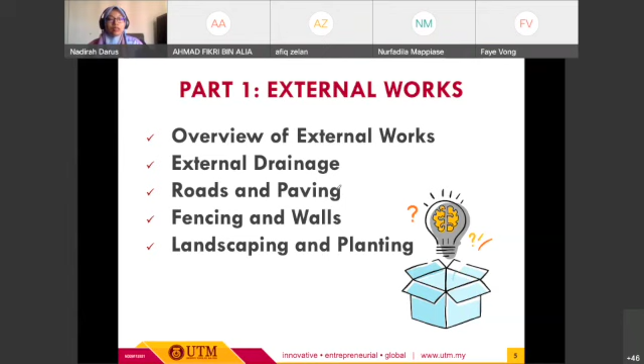Sama juga, we have two parts. First topic that we try to cover is on external works, and then later on we will cover on IBS, Industrialized Building System. For external works, basically this is the content ataupun sub-content, which consists of overview - lebih kepada introduction ataupun definition - and then we try go through each of these elements of external works. Lepas tu kita continue to the second part.

Untuk external works ni, basically it refers to any works carried out to the external surrounding ataupun environment of a building project. Maksudnya once building has been constructed ataupun completed, the next process ataupun construction activities is to construct the external works. So these external works can be works to functional or aesthetic features. Sometimes dia boleh jadi both, functional and aesthetic features to the building surrounding ataupun external environment. Kalau kita tengok dekat ni on our right side, we have a detailed definition by

Construction Industry Development Board, CIDB. This is the detailed definition for external works. Kalau ikutkan kat sini, dia quite similar. So it mentioned that external works refers to any shelter, linkway, external drainage, roadwork, car park, semualah, any facilities that required for the buildings ataupun for the project itself. So dia boleh jadi banyak ataupun less than this lah dia punya external works, depending on the size of the project, depending on the requirement.

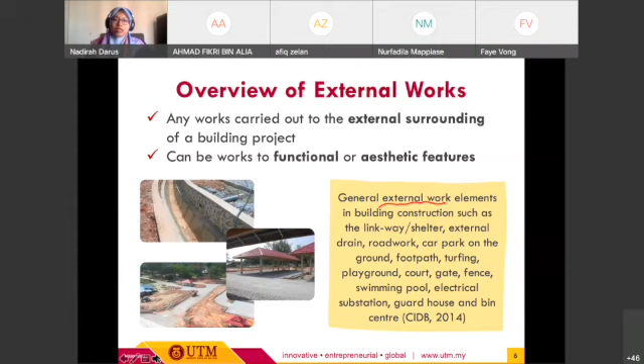Kalau kita tengok ni contoh-contoh lah macam drainage ataupun longkang surround the building area, external area. Lepas tu kita ada roadways ataupun car parks dan we have any paving ataupun pavement, semua tu fall under this external works. Basically dia quite straightforward je lah, cuma kita kena betul-betul ada identify apa jenis-jenis kerja fall under external works.

Alright, so we try to go through one by one. First element ataupun first work adalah yang paling utama selalunya external drainage, dia punya sistem perparitan lah around the building. Maksudnya daripada building dia nak transfer to the discharge, kita kena cover lah subtopic of external drainage ni. External drainage ni dia ada two main types: first one we have surface water drainage, and then we have foul or sewerage drainage. Yang ni memang fokus on the sewerage itself.

Okay, sebelum kita tengok detail each of these two drainage, we need to know the principles of good drainage. Basically untuk good drainage, we need to have adequate strength and durability of materials. Sebabnya kalau kita tengok kebanyakan drainage ni dia install atau constructed underground, underground piping kan. So that for sure we need to concern with the strength and then durability of the piping itself, for example lah. That's why we need to have this first principle.

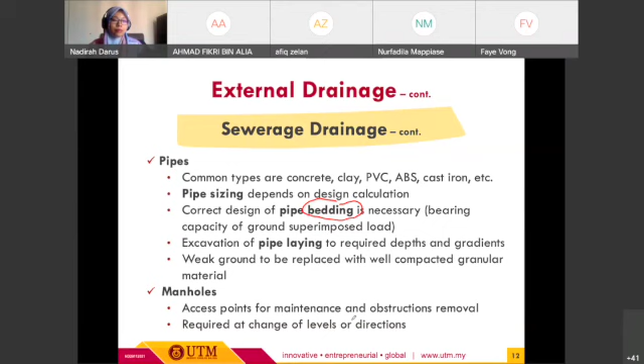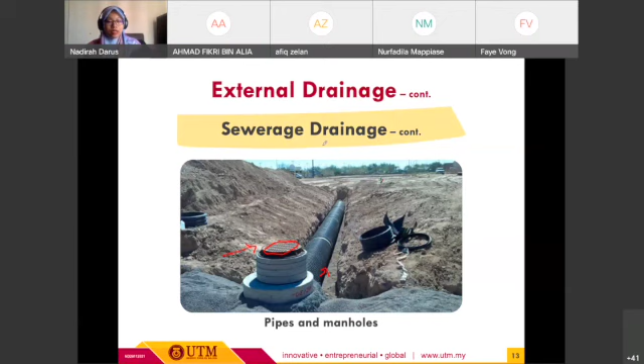Okay, so up to just now we have covered the first one untuk external works, and then the second one kita proceed kepada roads and paving. So untuk external works tadi, yang first one, external drainage, semua clear?

Okay ke? Okay okay, Aida okay. Alhamdulillah semua okay, hopefully semua masih okay.

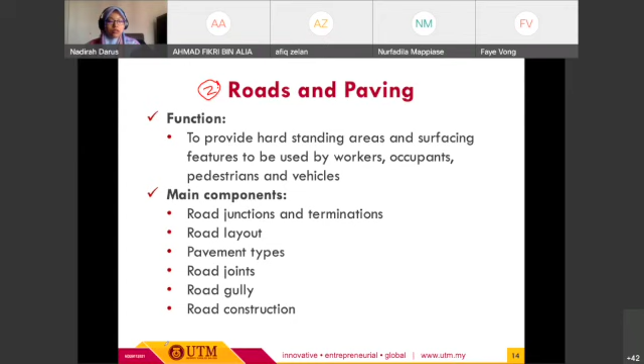Okay, untuk the first one we have road junction and termination. Kalau kita tengok dia punya term pun quite straightforward. Junction ni intersection ataupun simpang lah. Ni pun kita kena ada proper layout for the proper planning for the road junction and termination. Termination ni selalunya hujung, hujung jalan ataupun kadang-kadang kita panggil jalan mati. Maksudnya once kita dah ke termination ni, selalunya kalau contoh kita dah sesat, kita kena U-turn balik. So basically ni dekat road termination.

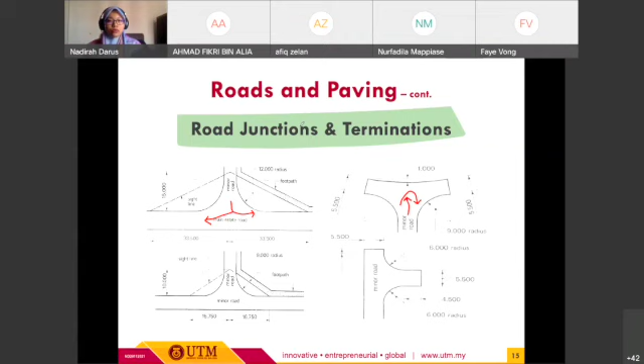Okay, so kita cuba tengok contoh, this is some of the example for schematic drawing for these two components. Kalau kita tengok ni, ni road junction, dia relate dengan road layout. So this is the common road layout at residential areas. Kalau kita tengok kat sini, kita tengok ada road junction, ada to the left atau to the right. So maksudnya jalan dekat area perumahan ni still ada junction.

Basically kalau untuk termination dia dekat hujung, maksudnya dekat end corner lot, memang dekat unit rumah yang paling hujung. Baru kita boleh access, maksudnya kita dah tak boleh access lah paling hujung, selalunya kita akan terpaksa U-turn, ke depan balik ke jalan utama. Okay, so untuk road layout ni, the planning itself ataupun the design, dia punya road width according to the traffic flow.

Okay, dekat area perumahan kita kena tahu berapa dia punya lebar jalan tu sendiri. Okay, selalunya dekat jalan perumahan dia tak adalah terlalu lebar sebab akses dalam kawasan perumahan dia limited to macam heavy vehicle tak boleh, depending on the restriction ataupun limitation.

So we need to look at the traffic flow. And then there are also layout problems in terms of this, relating to junction and termination of cul-de-sac routes. This cul-de-sac refers to the termination point.

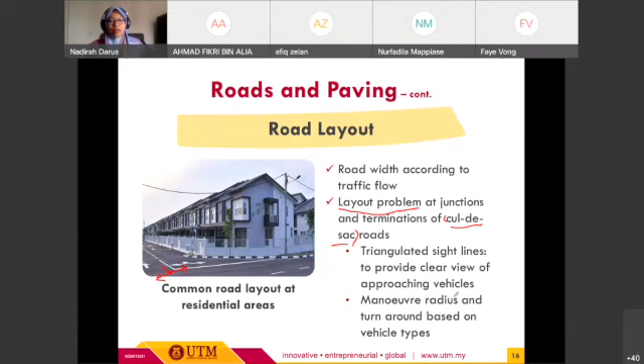Okay, so that's the second component. The next one, we also need to briefly know about pavement types. Basically if we follow the topic, pavement itself is a big topic, but it's okay for our class, we try to cover it briefly so that we can refresh, so that we at least know. I think everyone already knows about pavement types.

We have the most common ones, rigid and flexible. This is also applicable to main roads or roads outside. The basic principle is the same. We have rigid and we have flexible.

What's most important is the main difference, which is in terms of material. For example, if rigid, it is constructed using concrete. Compared to flexible, it is constructed using asphalt or bitumen covered stone, or similar material, since now for pavement research we have various alternatives. So we try to at least know the basic fundamentals.

And then as the name mentions, rigid has no flexibility compared to flexible concrete, or flexible road or pavement. Then there's a description - for rigid, it requires joints.

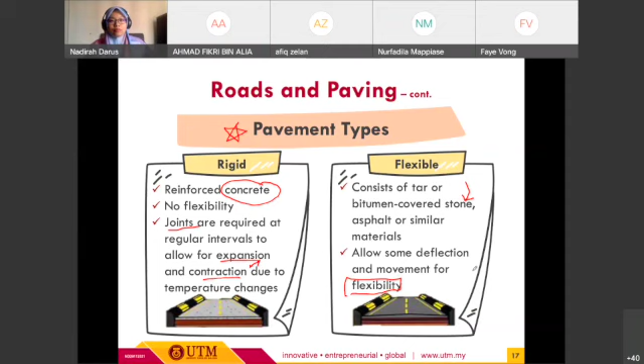Okay, can everyone hear? Okay. Can you hear, Aida? Still okay. So I hope the rest of you can still hear too. Okay, continue. Alright, thank you.

Okay, continuing to that, still regarding rigid and flexible pavement. In terms of advantages, if we look at rigid pavement using concrete, it is more about long and maintenance-free surfaces. Compared with asphalt pavement or ordinary tar road, it sustains longer.

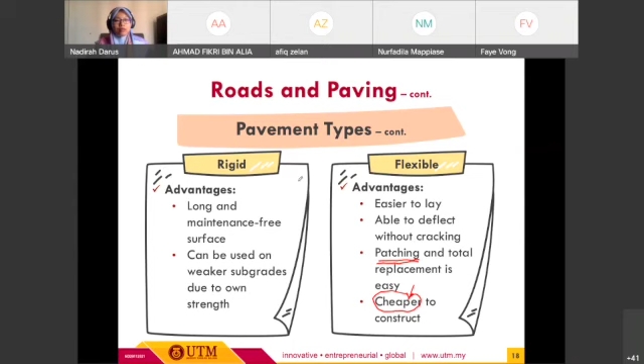Okay, now in contrast to the previous one, I think I already mentioned the disadvantages for each of the pavement types. Okay, so later try to go through them one by one.

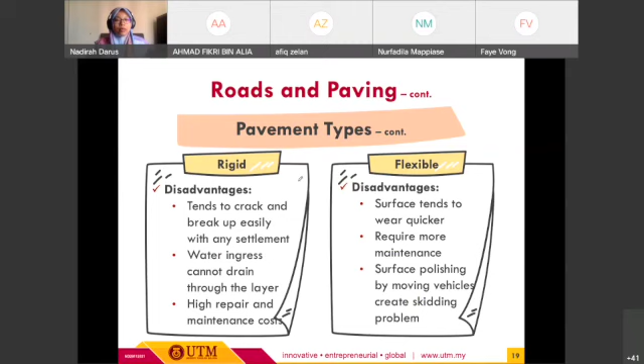Okay, the next component related to roads and paving as external works. As I mentioned previously, we have joints. Road joints are basically for the concrete pavement or rigid pavement, because it needs allowance for expansion and contraction joints. This is very important, because concrete pavement can easily fail or get damaged, especially in terms of cracking, due to temperature changes, since concrete has expansion and contraction properties.

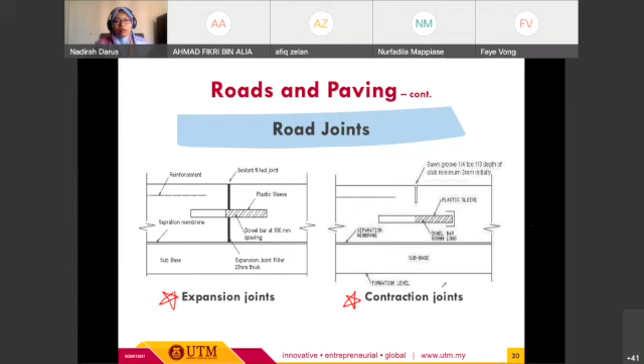Okay, the other component related to roads and paving, we need to have road gullies. This is for drainage too, relating back to external drainage, because it's part of the road water collector. It collects water from the road surface - when rain falls on the road surface, there's usually a slight gradient to allow for flow, so it goes into the road gully, which collects the road surface water and discharges it to the storm water sewer or surface water sewer. That's the component for roads and paving.

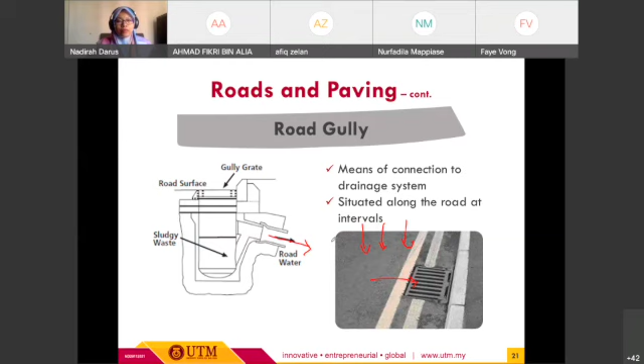Another thing about roads and paving: if we look at road construction, it will begin after the completion of the drainage system, service ducts and other utilities below the road pavement. So any underground works or activities we need to do first, and only after all underground work is completed do we proceed to road construction. Otherwise it would be wrong - we can't construct the road first and then do the underground piping.

So that's more about the method of work or procedure itself. We need to settle any underground piping work first, then proceed to cover it up, then proceed with road construction. After that, surfacing will only be applied after completion - this is the final finishing of the road surfacing.

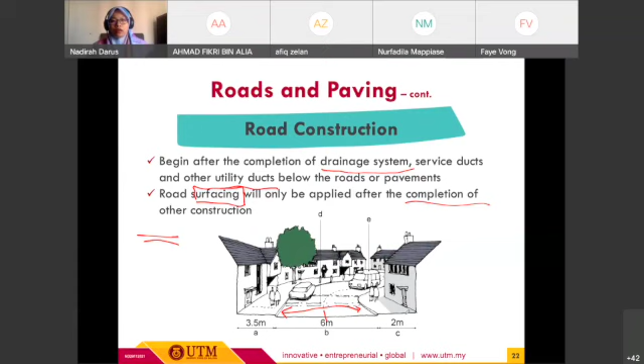So if we look here, this is just a simple illustration of our roadways, usually 3 meters width for each lane, 3 meters, and on both sides we usually have a footway, meaning a pedestrian walkway. This depends on the design or detailed landscaping for each building or project itself. So that's all for the second external works.

Next we have fencing and walls. So far okay for the second one, external works? Alright, then for the third external works we will cover fencing and walls, sometimes called walling - whether we use a fence or construct the wall itself.

So the function of fencing, which we already know - the most important is in terms of privacy or security, to avoid or cut down any unwanted pedestrian or vehicular access. Security, then to provide privacy, and then to give delineation between areas. This means when we construct fencing or walling, we can limit the boundary. So that's the main function of fencing.

Okay, the main types of fencing are low level and high level. Usually low level can just be wooden, meaning using a wooden fence, just simple fencing.

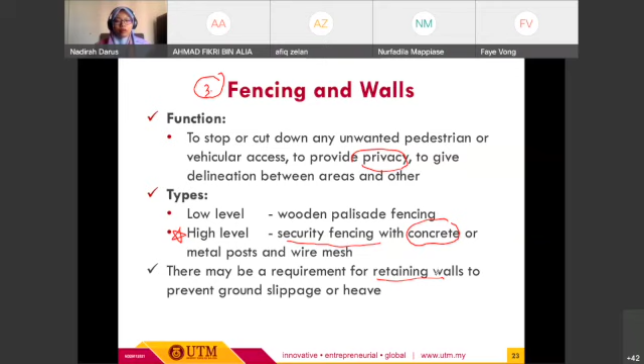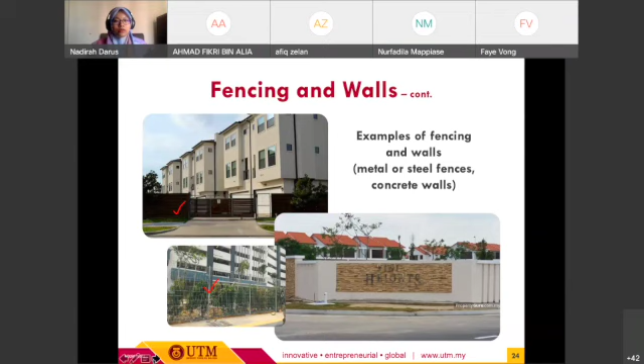Yang ni contoh dekat Mutiara Rini, residential area Mutiara Rini, which is Rini Heights. Rini Heights dia ada concrete punya wall surround the residential area. So saya rasa that's all for the fencing.

Untuk fencing, untuk pagar building tu dia quite straightforward je. And then we have the other components for external works, which is landscaping and also kadang-kadang kita panggil planting, lebih kepada landscape surround the building area atau external area of the building.

Okay, there are several functions untuk landscaping and planting ni. First, we want to protect and reinstate the site, sebab once the building complete, luar bangunan tu punya surrounding, punya environment for sure akan ada kesan tanah, tanah yang masih tak level, dan environment in terms of landscaping memang tak cantik. So that's why in terms of dia punya estetik dan untuk improve the pemandangan di luar bangunan, kita cuba construct external works focusing on the landscaping.

Lepas tu yang paling penting juga untuk activity landscaping ni, kita try to prevent erosion of land and slope. Kalau kita tanam pokok, tanam rumput, that one will be part of the natural support to avoid this erosion of the land atau soil.

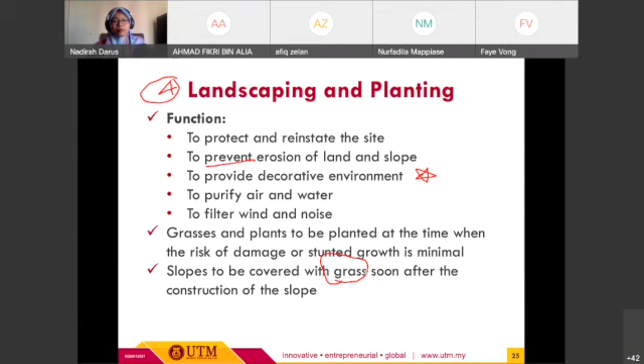Ni contoh untuk landscaping and planting. Ni dah jadi common view, kita dah biasa tengok di sekeliling luar bangunan tu ada all this kind of trees atau rumput, pokok bunga ke, to improve the landscaping of the building itself. Macam ni dekat slope dia dah tanam rumput. Memang kita pun ada firm atau company yang memang untuk landscaping je, so dia punya kerja will focus on the landscaping and tree planting for the external building area.

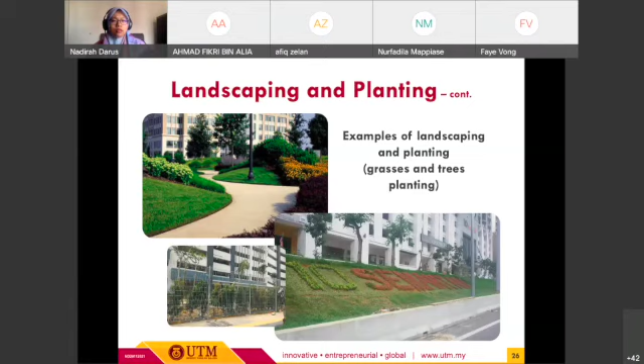Asalnya tu je untuk landscaping. So sebelum kita proceed to the second part, kita rehat kejap. So saya rasa without further delay, we will continue to the rest atau second part of our today's class, okay, of our lecture.

Next one we are going to cover part 2, which is on IBS, industrialized building system. So this is our second part. There are several sub-contents to be covered, starting from the overview until the challenges of IBS implementation. Rasanya dah tak banyak dah yang ni. So we try to cover each of the sub-content.

Alright, for the brief introduction on IBS, basically IBS refers to the construction process that utilizes techniques, products, components of building system which involve prefabricated components and on-site installation.

Okay, kalau kita tengok kat sini, IBS ni most of us dah memang well versed lah, dah memang familiar dengan term IBS sebab IBS ni pun dah jadi current requirement, dia punya in terms of implementation dan juga in terms of dia punya awareness tu. Kalau ikut sekarang masing-masing dah aware lah dengan apa itu IBS.

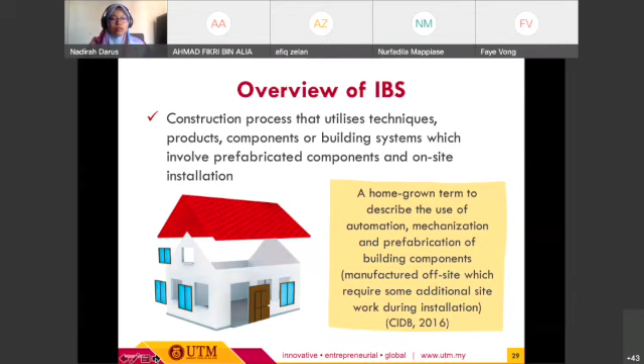Okay, so the next one. For the overview of IBS, kalau kita tengok IBS tu sendiri, dia punya components is systematically done using machine, formworks and other forms of mechanical equipment.

Lepas tu dia punya konsep adalah components ataupun building components itself are manufactured atau produced off-site and delivered to the construction site for the erection ataupun installation. Maksudnya instead of in situ punya works, in situ maksudnya kerja dekat site tu dari segi concreting ataupun dia punya formwork installation, dia dah buat siap-siap dia punya components at own factory lah ataupun manufacturing site, and then component tu will be delivered to the construction site. Lepas tu all building components such as wall, floor slab, beam column and staircases are mass produced.

Okay, maksudnya in terms of quantity, components will be produced in mass quantity either in factory ataupun sometimes dia boleh jadi juga dekat site, tapi with the strict quality control and minimal on-site activities. Maksudnya most of the components will be produced in the factory. Some maybe minor components ataupun untuk complete the installation, that one will be completed on site. Lepas tu dia involve the mechanization of the building process, sebab benda tu dah produce in the factory and then transfer to the construction site.

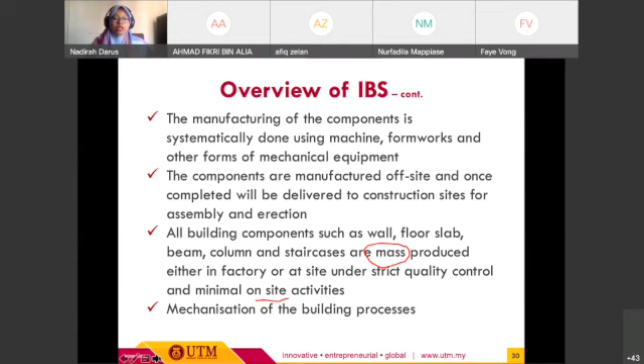Okay, so as for overview ataupun introduction juga, this is regarding the adoption of IBS in Malaysia. Maksudnya lebih kepada dia punya timeline ataupun dia punya history of the IBS in Malaysia. Okay, if we look back untuk IBS, kalau kita tengok dia sebenarnya dah lama introduce ataupun dah ada dekat kita punya negara lah, maksudnya sebelum ni dah long introduced since 1960s.

Okay, introduction of IBS based on European countries. Sebab during this time our country representative lah ataupun government representative basically from JKR Public Works Department and also Ministry of Local Housing Department, kalau saya tak silap, they represent and participate in the evaluation and they join the visit to the European countries in order to evaluate their housing plan. Okay, so dari situ IBS ni dah mula ataupun dah being introduced in our local scope, since 1960s yang ni. Ini dia punya, kalau kita tengok balik lah dia punya timeline.

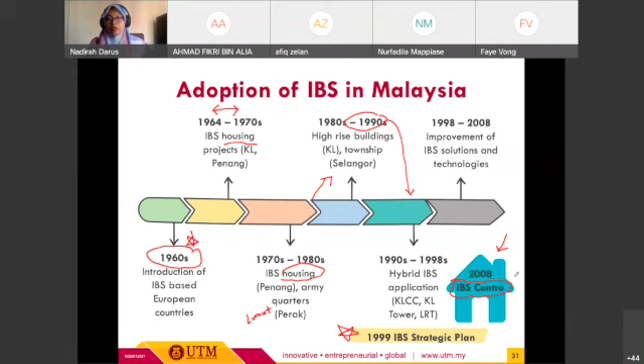And within 2008, an IBS center was also constructed under CIDB. So this is the journey or chronology of IBS in Malaysia up to 2008, and then it continued.

As part of their initiative or measures, they came out with the roadmap for IBS, in terms of strategic planning for IBS implementation. The first one was a 7-year plan, 2003 until 2010. Later on they came out with the 2010-2015 roadmap. So throughout the implementation, this is the general chronology.

At the same time we also have the CIMP, Construction Industry Master Plan, which highlights IBS use. Then up to 2020 we have the Construction Industry Transformation Plan, CITP. And up to today, IBS has become even more commercial in terms of the manufacturing of IBS components and the construction itself.

Okay, let's look a bit later at the rest of the content related to IBS.

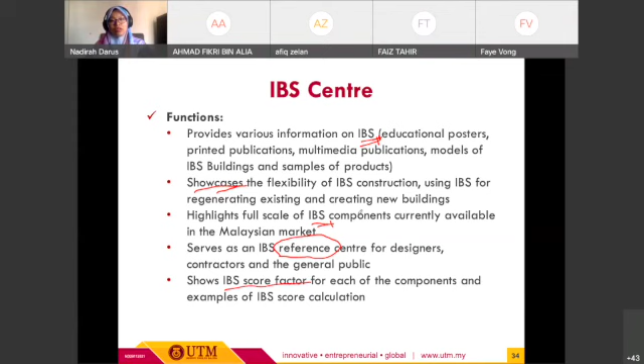So apart from providing various information, it showcases examples of IBS construction, whether for regenerating existing buildings or creating new buildings using IBS. Then it has examples of IBS structures and components currently available in the Malaysian market, more related to manufacturing. So far IBS Center or CIDB is the main reference for designers, contractors and the general public for the implementation of IBS. Let's look at an example of IBS components under IBS Center.

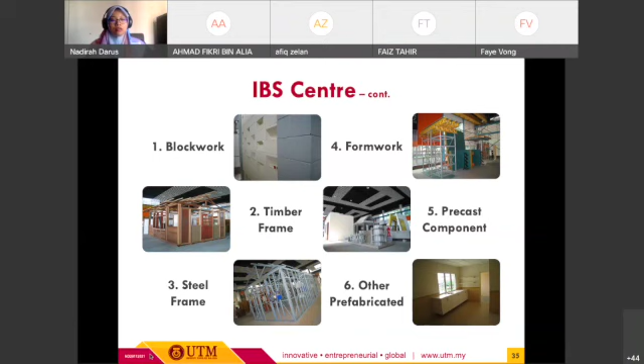Again under CIDB, as I mentioned, IBS in Malaysia is currently directly in charge, handled by CIDB. According to CIDB, they have classified the IBS system into 5 categories such as this: precast concrete frame buildings, precast concrete wall, so there's frame, wall, and slab, then steel formwork and also steel frame buildings. So these 5 are the main categories of the IBS system as classified by CIDB.

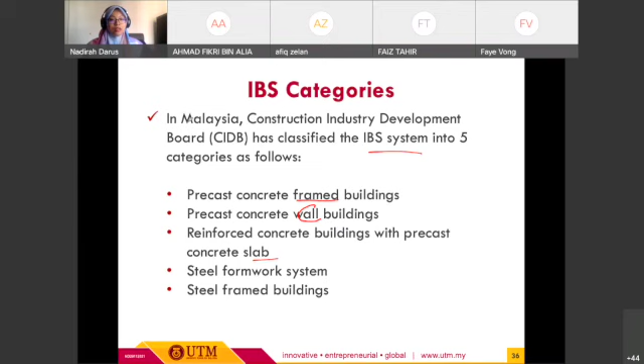This is an example of an IBS structure that has structural steel frame, then slab, and column and beam. So this is the sample for the IBS illustration.

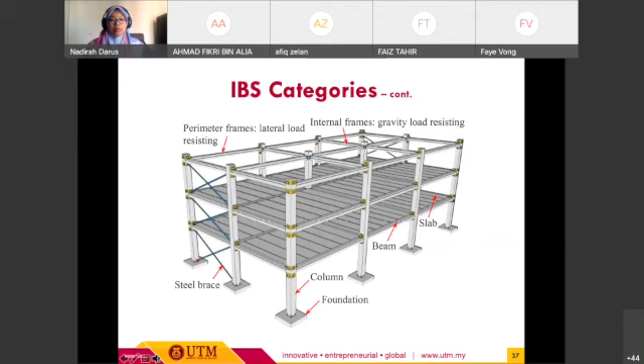This is similar, more related to components as Sabta and Faiz shared earlier, construction of residential buildings using IBS. So basically it's like this, different components of the building - there's wall, floor, and frame, beam or column - they come to the site already split. So at the site they will interconnect, install and connect each component on site. It's more or less like Lego.

So regarding the problem mentioned earlier, like water leakage or gap opening, the issue is really at the connection. This directly relates to the component design - meaning each individual component design needs to make sure every component matches the other components so that we can close the gap properly. If not, it becomes the problem mentioned earlier. This really becomes a major issue because it will affect the building condition and affect the building's lifetime, which requires more maintenance and repair.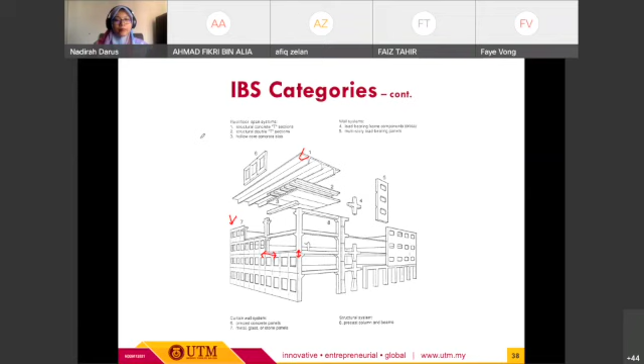Okay, this is what we mentioned earlier too. Following from the leakage issue, it can become a main issue and a disadvantage of IBS. However, as an initiative, our government and construction industry representatives try to overcome these problems and aim for the advantages of IBS.

If you use IBS, it will lower the overall cost of construction. It might produce higher and greater productivity, because at the same time it speeds up the project timeline. So in terms of cost, time and productivity, all of these are quite advantageous because the time becomes shorter, productivity is higher because we reduce on-site works, we reduce in-situ concreting and in-situ construction works.

We just use the prefabricated components and install them on site. Like before, the concept is like connecting Lego components. It still requires some in-situ concreting just to cover up the connections, cover up any required opening. Also, in terms of safety and health issues, it will record fewer cases.

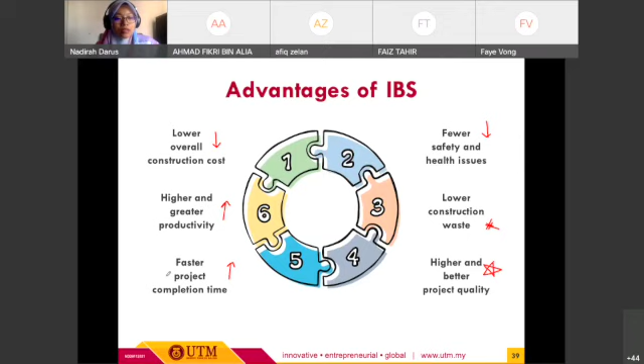Because there's less in-situ works and it lowers construction waste since we no longer do on-site concreting and so on. And in the end, if we don't overcome these issues, it's hard to achieve higher and better project quality. But once we come up with better solutions, it will for sure produce higher and better project quality, while reducing project time since it can be faster compared to conventional construction. So here is the description and detail regarding the advantages of IBS - try to read through them one by one.

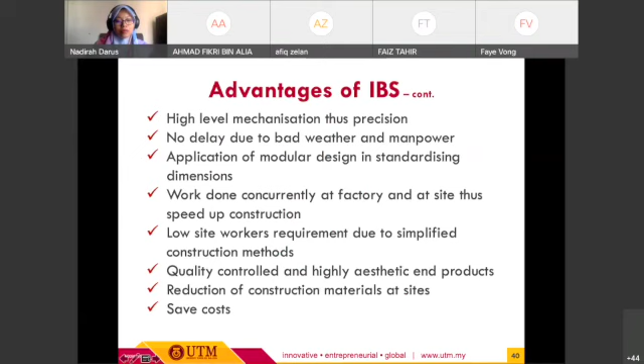Lepas tu dalam masa sama boleh juga search for additional reference, related reference. Okay, so tak perlulah untuk saya baca satu-satu yang ni, the advantages of IBS, sebab part of this, some of this have been mentioned ataupun kita dah discuss earlier.

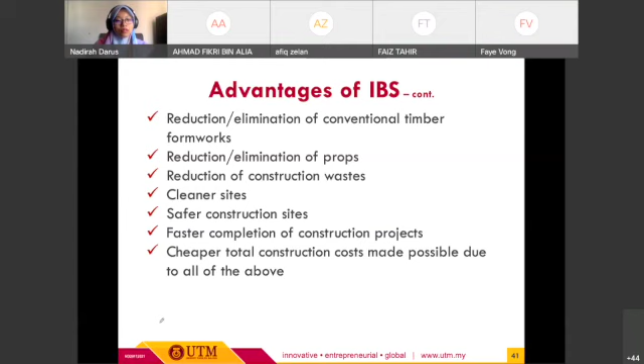Okay, and next one we have, ni lebih kepada challenges lah. Ni pun ada some of the content we have mentioned just now.

Okay, in terms of challenges, kalau ikut kat sini, I have categorized into four types lah, four challenges. The first one regarding the design, tadi kan kita dah mention paling penting design. And then equipment, especially the heavy equipment to lift, to hoist the building components ataupun IBS components.

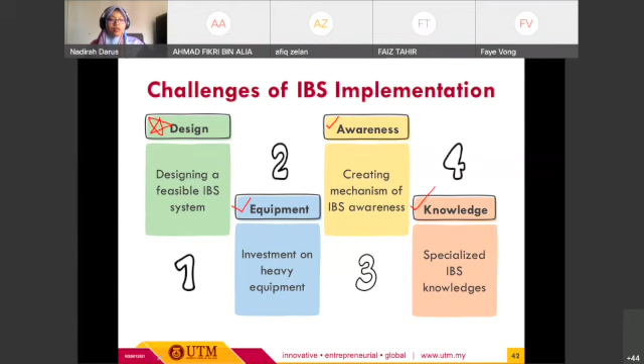okay kan dia mention kat sini, IBS system is if properly designed can deliver a more efficient construction process. So nak tak nak memang kita kena ada proper design, especially related to the IBS component macam wall, slab, so that dia punya connection memang fix ataupun memang proper connection, so that tak adalah future problems related to the large gap which cause the water leakage, any potential issue, okay, regarding the building constructed using IBS component.

Okay, lepas tu main challenge is that to provide a feasible and innovative IBS system that is acceptable. Sebab sekarang ni bukan majority lagi accept the IBS. Ada juga certain practitioner ataupun party still go for conventional construction.

Okay, so at our level macam CIDB ke apa, they try to provide more awareness, provide more training, semua tu yang berkaitan untuk highlight the advantages, and at the same time dia cuba improve the implementation of IBS ni in terms of design lah especially.

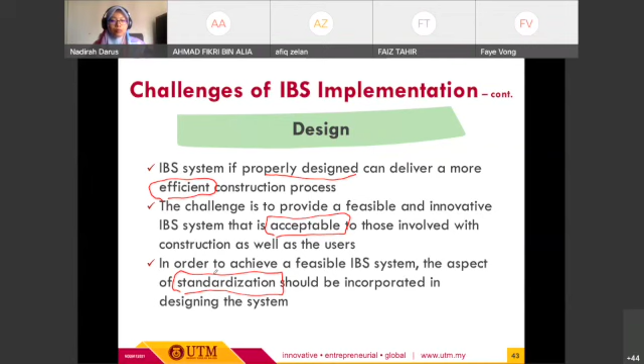Okay, we still continue to the standardization. Macam ni dia include the use of standard connection, okay, standard beam and column size. Dia lebih kepada sizing dengan dia punya jenis connection tu lah. So that benda tu akan improve the situation lah tadi. Kalau kita dah ada benda yang standard, so dia punya implementation on site tu boleh avoid the future ataupun potential issues such as masalah tadi lah, leakage ke apa tu kan.

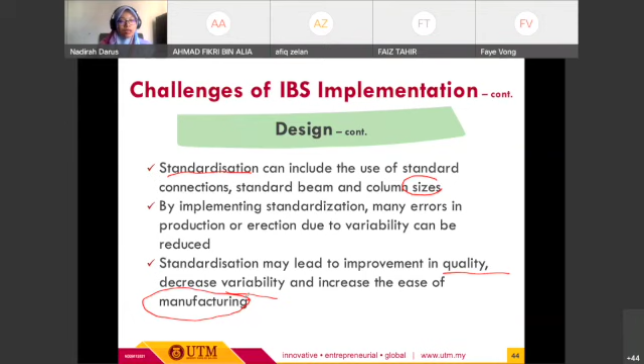Alright, so all of this related to the standardization, boleh improve quality, decrease variability and increase the ease of manufacturing. Okay, so semua kilang yang produce precast components of the building of the IBS, dia lagi senang lah sebab they are referring to the same standard.

Okay, the next challenges usually related to the equipment ataupun machineries required to the IBS construction. Okay, kalau kita tengok kat sini, successful IBS construction has certain degrees related ataupun depend to the heavy and special equipment.

Okay, sebab they require mobile crane ataupun any heavy plant and machineries to handle and to lift all the components, to transfer the components to its place lah. Maksudnya untuk angkat, untuk placing the components so that dia boleh connect between each of the component.

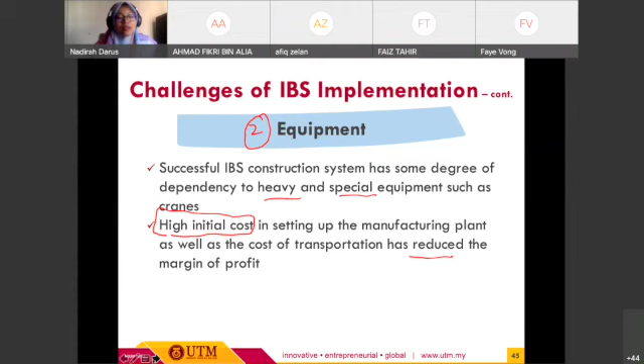Okay, tapi benda ni sebab dia perlukan heavy equipment ataupun plants tu, so for sure dia relate dengan high initial cost. So that one boleh jadi part of the challenges of IBS implementation, because all of this again relate to the cost factor ataupun budget for the project. Okay, sebab dia akan reduce the margin of profit. So that one will be the concern lah untuk ni related parties to implement IBS.

Okay, so the next one we have again we have awareness. Awareness pun kalau ikut as compared to previous, currently kita dah ada higher level of awareness lah regarding IBS. Tak kira dekat level student ke, dekat level industrial practitioner pun benda ni dah jadi common in our as part of our knowledge ataupun part of our exposure.

Okay, macam tadi pun contoh daripada siapa tadi, Faiz, dia dah pernah involve dengan IBS, so benda tu directly dah jadi direct involvement to the actual project. So in terms of awareness tu still ada lagi maybe ada certain pihak dah aware, cuma kita nak improve their awareness. Kita the related party especially CIDB lah, CIDB IBS ni they conduct the campaigns ataupun any programs,

any training, seminar semua yang berkenaan dengan IBS implementation in our country. Okay, dalam masa sama dia provide training.

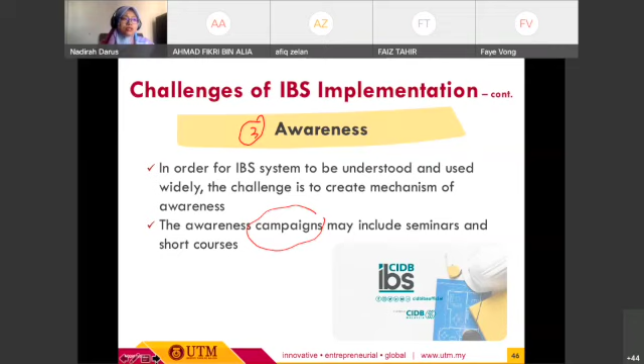Benda tu boleh jadi professional training. Kadang-kadang training tu ada level lah. Kalau untuk engineers dia lain, so benda tu lagi high certification lah.

Okay, saya rasa tu je lah untuk IBS punya topik. Macam dah tak ada kot ni. Dah habis. Okay, so far okay semua?